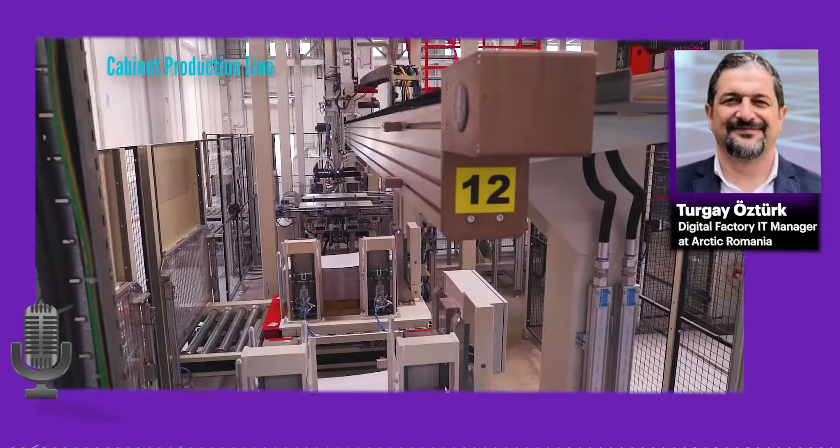Yeah, super, thank you. My second question is, how does Arctic Factory really stand out? Arctic Factory really stands out with its expertise and level of digitalization, Marinel. It was built with the combination of lean manufacturing and connected systems. From design to realization, every step was planned and executed carefully. So it's not only the Lighthouse factory, it's also the most efficient factory in the group in terms of productivity, cost, and quality.

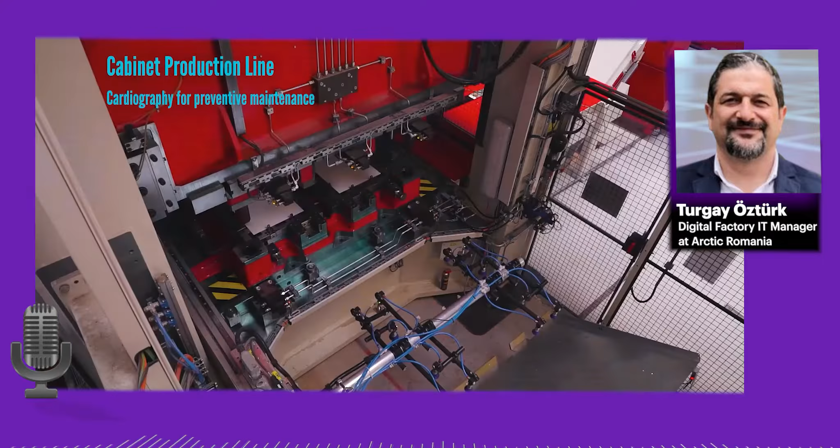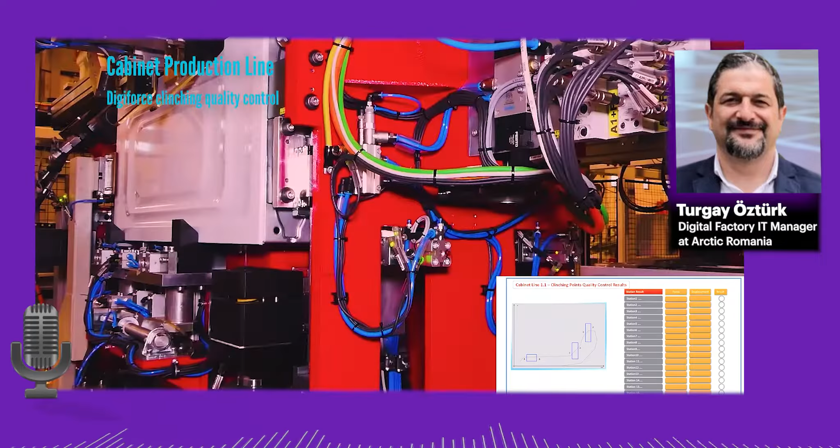These achievements were also recognized and evaluated by several global organizations. The World Economic Forum recognized the Arctic Ulmi factory as an advanced fourth industrial revolution Lighthouse network member. Arctic was also ranked top at the IDC CIO Award and took first place in the Future of Work category. The Ulmi factory has been selected as the gold winner of the SAP Quality Award in the innovation category in Turkey.

Besides being an outstanding professional achievement, it also provides a bird's eye view of all the integrated systems. I mean, it is one thing to work on a small part and not see all the connecting points involved, than to be able to see such a project come to life.

Mihai, how is it to work on such a digital project?

It has been great. All of this was made possible due to Arctic's goal to quickly transform its core production and manufacturing capabilities with intelligent automation and drive innovation as a true digital enterprise. A challenge that we have gladly accepted.

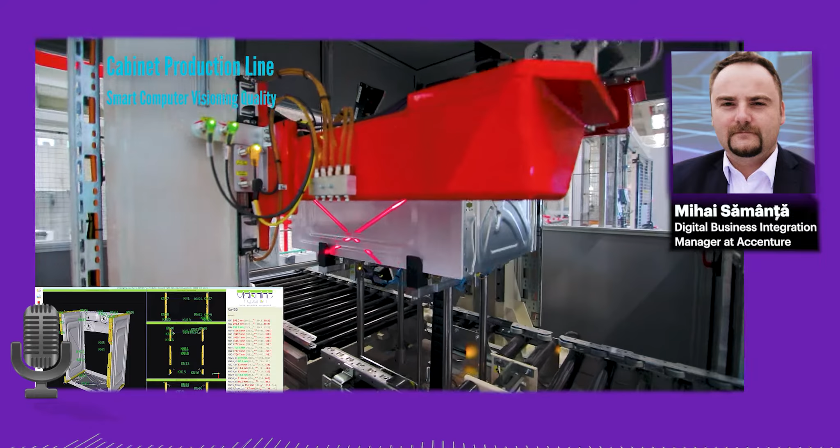Making just incremental changes wasn't enough for Arctic, as it aimed to do more by creating a plant that would serve as a beacon for the industry and an enabler for digital transformation. It had massive production lines and shifted from a workflow-driven to a data-driven manufacturing, promising enhanced efficiency and product quality. With a digitized and automated plant floor, Arctic could experiment with exciting new technologies that reduce cost, increase efficiency, and enhance performance visibility. Modernizing manufacturing processes also offered significant business opportunity for creating connected products from design to consumer services.

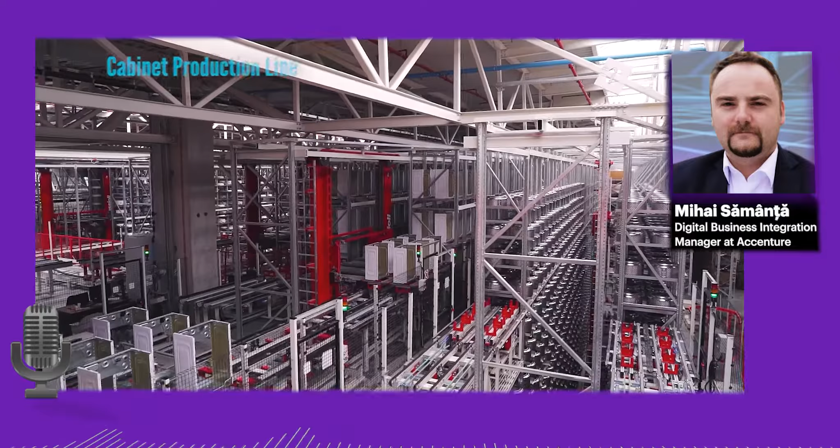It has been an exciting journey to be part of this massive digital project that Arctic started in Ulmi, near Târgoviște, Romania, where our team of experts focused on Arctic's need to launch production operations on a challenging timeline for its newly built washing machine factory.

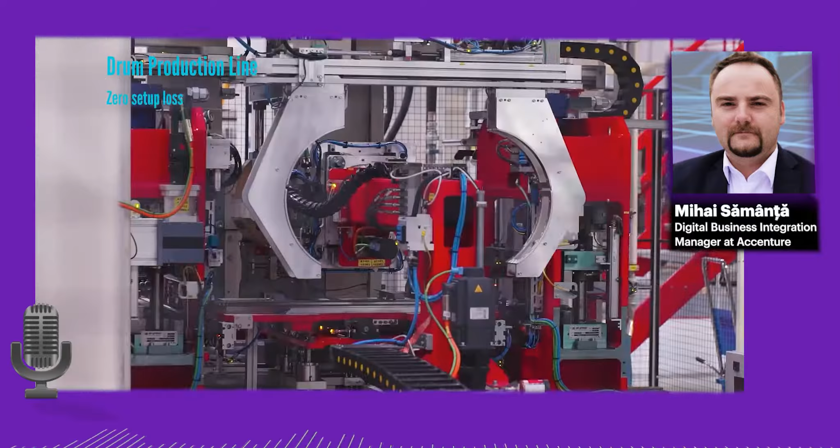Right from the beginning, we worked on site alongside the newly built plant operational management team, and this enabled us to quickly capture firsthand any issues that threatened to derail the solution timeline delivery, working with a myriad of equipment and service suppliers. Specialists from Accenture's network Industry X Innovation Centers in Cluj, Romania, and Modena, Italy, Finland, and Turkey worked with Arctic to blueprint and implement an SAP-based manufacturing execution system.

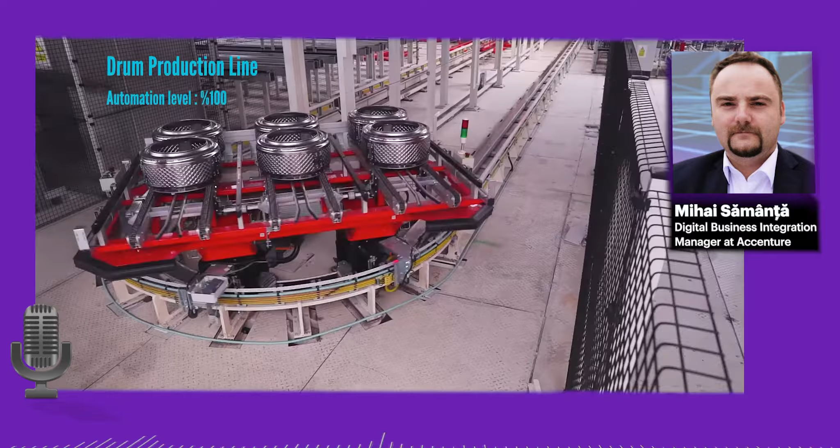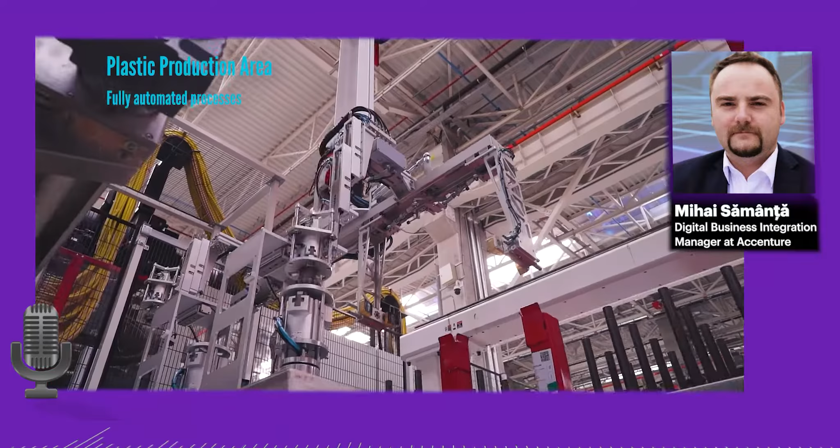The Accenture team also created a technology layer that integrated the solution with the company's business systems and machinery, so that they can share data and speak the same language. An Internet of Things solution linked with the company's enterprise resource planning system, manufacturing equipment, warehouse management, automated warehouses, and material distribution system and other IT systems.

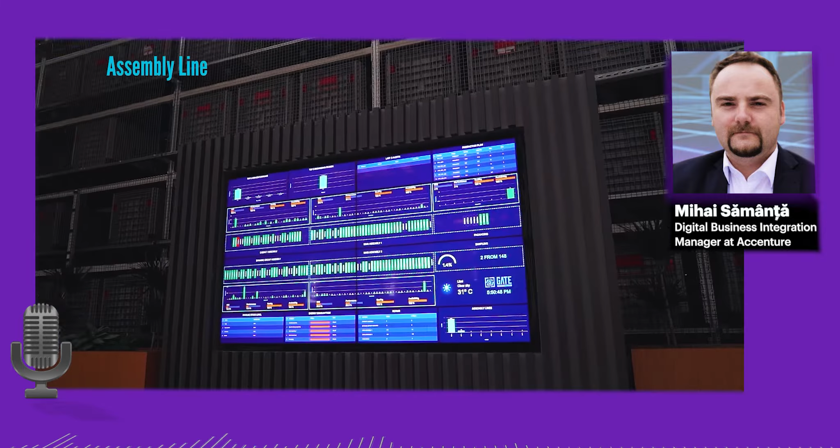We also designed easy-to-use dashboards to display near real-time data from the solution, company systems, and shop floor machinery. In total, we have integrated more than 250 shop floor machines and 14 different IT and business systems. The team standardized the machine integration messages and created a library so that the company can reuse them like building blocks for other SAP MES integration projects.

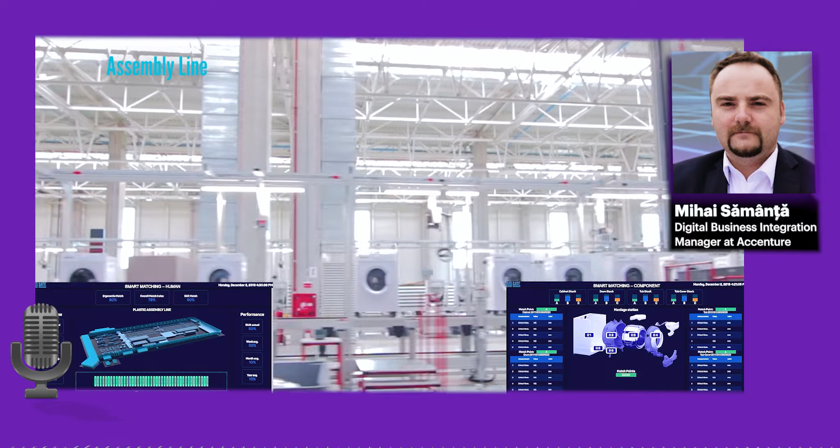The digital solution is changing also the way people work and the culture. The new solution enabled Arctic to better match jobs and skills, improving efficiency and worker experience. Most workers use a tablet connected to the company intranet and a new manufacturing system to consult work orders and build instructions in real time.

For example, Cristi, a production manager, used to request production status updates several times a day from the production shift leader. With the new system, he can review updates in real time on his laptop or tablet without having to ask anyone for a status update.

Workers can also call for support, report problems, and send feedback about speed, quality, and pack times. Plant workers can request the specific materials they need when they need them and have them delivered right to their spot on the line. And all that information is displayed in a user-friendly dashboard.

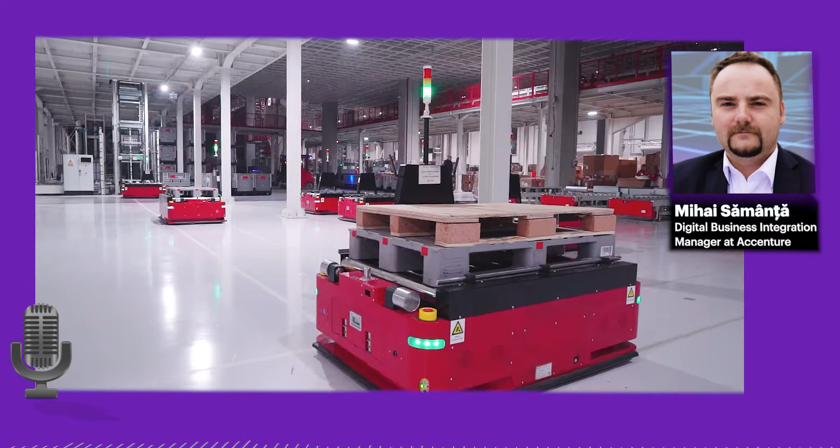Take Nicu, an assembly line operator, for instance. His job is to attach the electronic front panel to each washing machine. Previously, a forklift brought the electronic panels to his bench, stacked in ESD boxes, and he needed to call a colleague to help pick up the heavy boxes and carry them from the stack to his bench. Now he can use his tablet to request the panels, which are delivered just in time directly to his workbench via a rail-guided vehicle system.

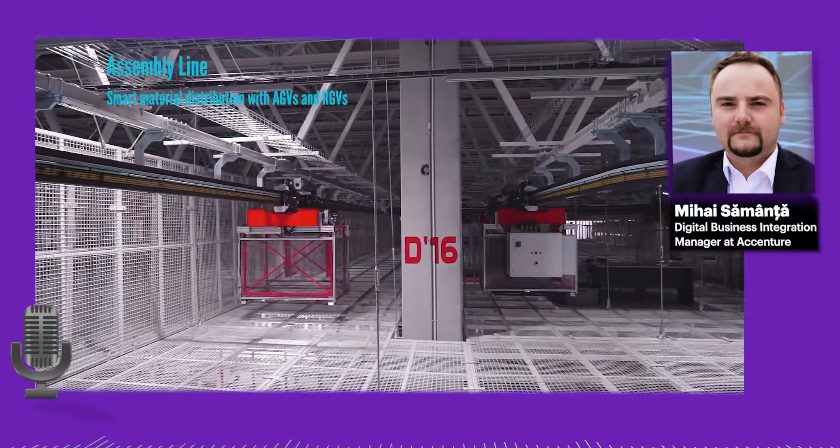By scanning the barcode of the electronic panel before assembly, he can check in real time if this is the right part for the current washing machine model. In one shot, this eliminates a health risk and enables Nicu to do a better job more quickly. In addition to improving productivity, the solution upholds Arctic's value of advancing employee empowerment, well-being, and safety.

The solution has helped Arctic to automate as much as 80% of its in-house logistic processes. The data flows to and from company and plant systems mean that important production information and equipment are always available for employees. They no longer need to spend valuable time manually checking information or materials. Management can also view real-time production data to make efficient decisions.

Since coming into existence, the plant has helped Arctic lower non-quality expenses, increase capacity utilization and automate low-value tasks, reducing operational costs by 11%. As a result, workers can focus more on valuable tasks that help improve productivity, product quality, and profitability. The plant was designated as part of World Economic Forum Lighthouse Network in 2019, making it one of the most innovative modern plants in the world.

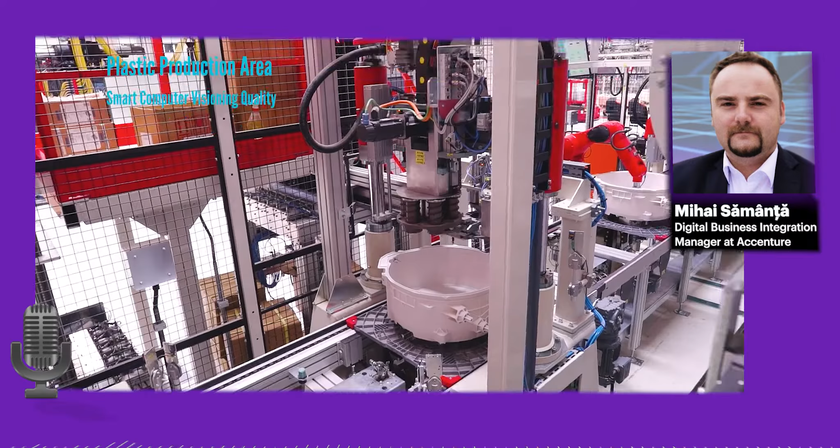Lighthouse Network factories are chosen for their leadership in applying fourth industrial revolution technologies to drive financial and operational impact.

The concept of Industry 3.0 is the ability to automate a process leveraging the compute functionality of industrial controls. On the other hand, Industry 4.0 is the automation of businesses by bridging the gap between ERP and MES, the production shop floor machines. In Arctic Factory, we have all this in a working production environment. It's both a lighthouse of industry and an intelligent factory.

The plant was designated as part of World Economic Forum Lighthouse Network, as you said before, making it one of the most innovative factories in the world. Turgay, what does this achievement represent for Arctic and for your team?

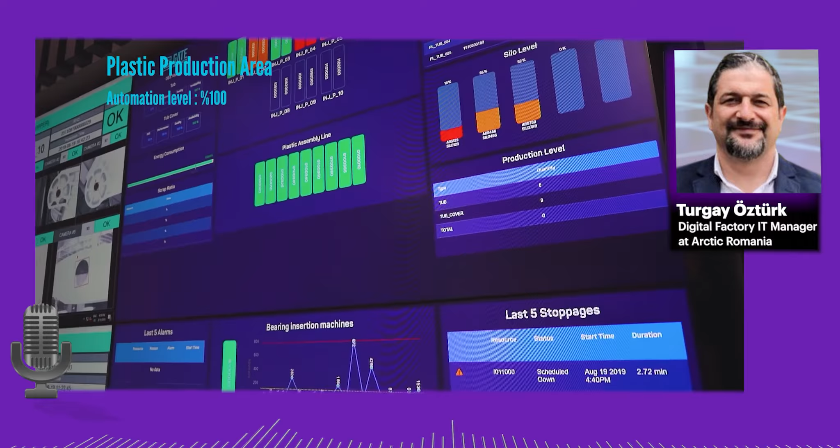This achievement represents for me and my team the leadership role of Arçelik's digital manufacturing journey. Our team motto is design the future of manufacturing. This factory is the first in Arçelik Group with this automation and digitalization level.

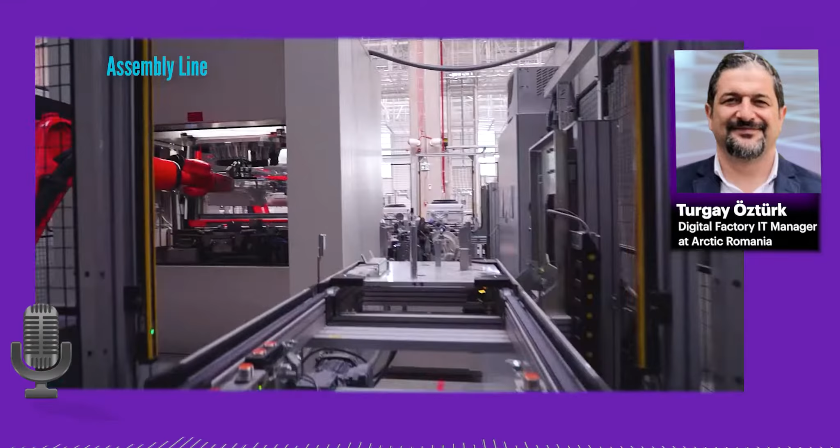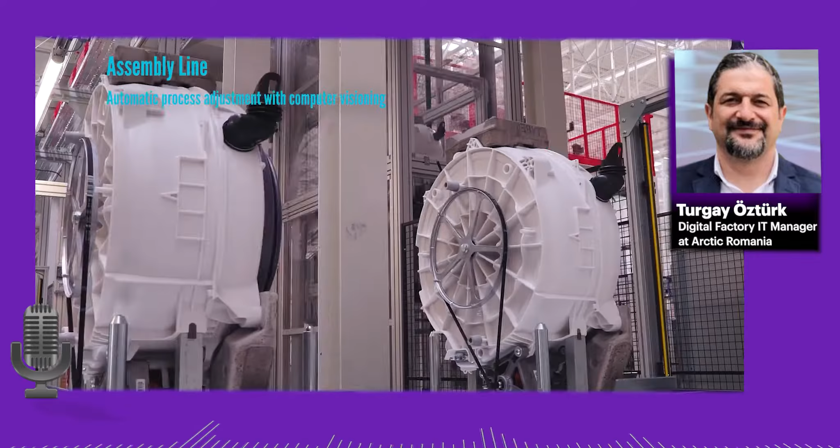We experimented with a lot of best practices and digital use cases in our garage facility, Atölye 4.0 in Turkey, which was built to train and prepare Arçelik for the Industry 4.0 revolution. Using the power of headquarter IT, which is leading an overall digital transformation in the group, we realized not only the digitalization of manufacturing, but also the integration with ERP systems and other corporate systems as well.

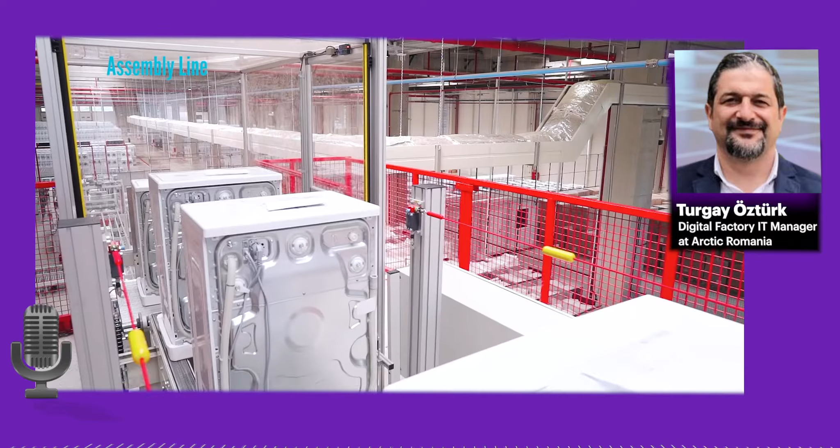Productivity and end-to-end integration were our topmost achievements as the IT organization in the group. This project was designed to increase collaboration within Arctic departments to accelerate productivity. Together with Accenture, we were involved in all the phases of construction, implementation, and integration. Now this digital working methodology became a daily routine and created the emerging strategy for our core businesses and culture. Of course, we know that on this journey we will continuously learn and improve ourselves as a team.

Yes, thank you. As I was saying even before, there is always room for improvement. There is always something new on the corner, a new technology will be out, and it's nice to see everything working together in such a way.

This is my last question for this podcast. What are the major benefits you have seen in one year of operation for this intelligent factory?

Marinel, honestly speaking, the business results for this factory are a historical success for the group in the first year. These business results include quality, efficiency, and financial improvements.

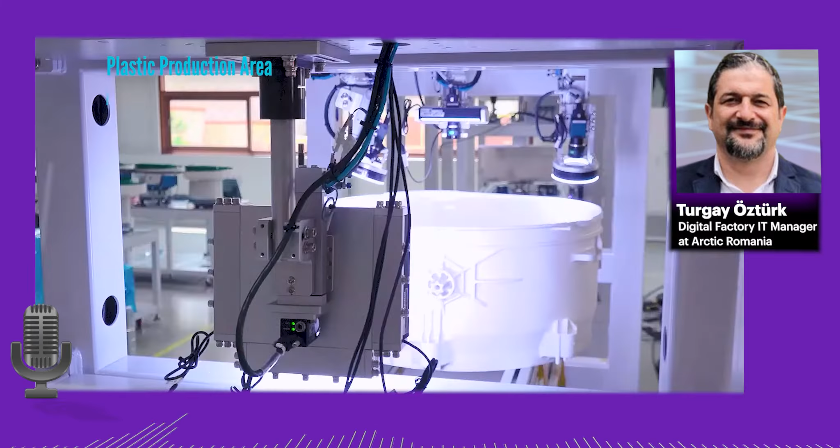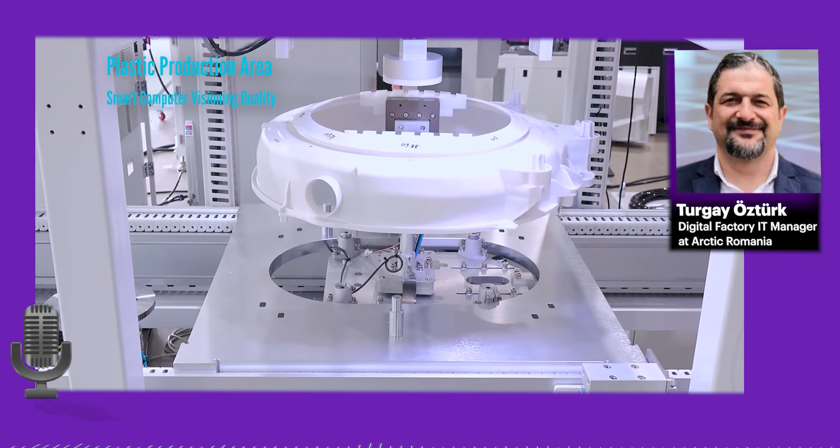All the information is in one place and can be easily accessed from everywhere using a PC or mobile device through web reports and dashboards where data is real-time. This helps us minimize downtime by taking fast decisions to solve possible errors that might stop production. Besides all this, this factory enables data analytic projects to have real-time relational and matrix data.

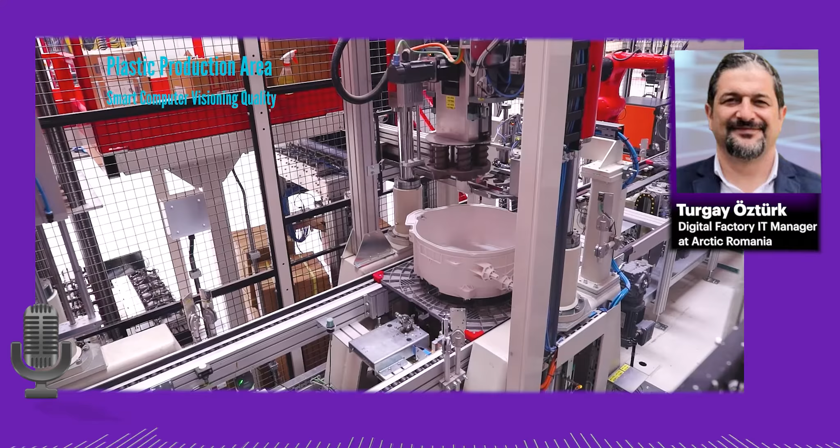As you may know, Arçelik has a vision based on serving customers worldwide with environment-friendly, best quality, and fully connected products. Arctic Diamond Factory will play a very important role in Arçelik's product design process in that manner as well. Thank you.

So yeah, these were my questions for today, and I thank you so much for your time. It's been a while since last time I visited the factory, but I hope we see each other shortly, and we see how everything goes together in the future, and what improvements and new technologies we'll see soon out there.